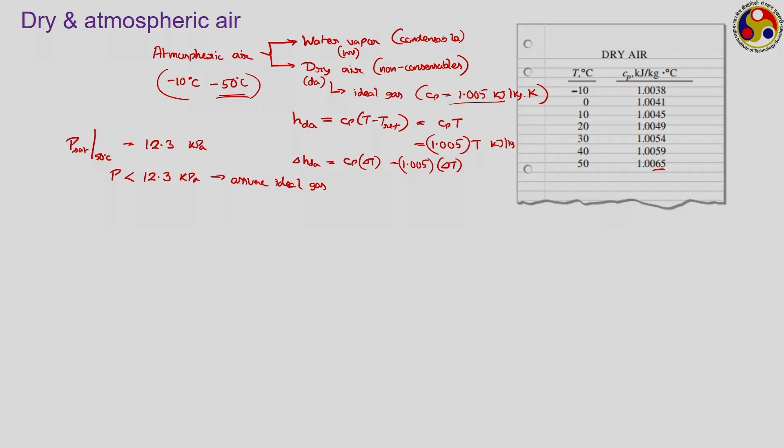Now, from the property values, it has been seen that as long as the pressure of water vapor remains below this 12.3 kilopascal, we can assume it to be an ideal gas with hardly any error, as we shall be seeing shortly, because within this zone we can safely use the relation PV equal to RT even for water vapor as well, and that simplifies our analysis quite a bit.

We are going to treat this atmospheric air as a combination of two ideal gases. One is the dry air part, the other is the water vapor part, and accordingly the total pressure can be represented as the summation of the partial pressures of the two components, the dry air part plus the water vapor part. So, the total atmospheric pressure is a summation of the partial pressures of dry air and water vapor, because we are assuming the dry air part and also the water vapor part as ideal gases.

While it is not very surprising that the dry air is behaving like an ideal gas, it may be a bit surprising with the water vapor, but that is actually a great relief to us, as we do not have to go to the tables to calculate the properties of water vapor. We can easily calculate this by assuming this to be an ideal gas. So, both the dry air part and water vapor part follow the ideal gas equation of state.

If we take a certain volume of atmospheric air, often called the moist air, the dry air is without the water vapor, and when we mix water vapor with dry air, this mixture is often called the moist air. So, if we take a particular quantity of moist air and we measure the corresponding volume and the temperature of the moist air, then we can easily apply the ideal gas equation of state over the entire mixture.

If we talk about the mixture, if P refers to the total pressure of the mixture and V is the volume, then PV should be equal to N into R bar into T, and this is for the total mixture, that is total moist air. Similarly, for the dry air part, we can write the partial pressure into the total volume equals the number of moles of dry air into R bar into T, and similarly for the water vapor part, its partial pressure into V will be equal to number of moles of water vapor into R bar into T.

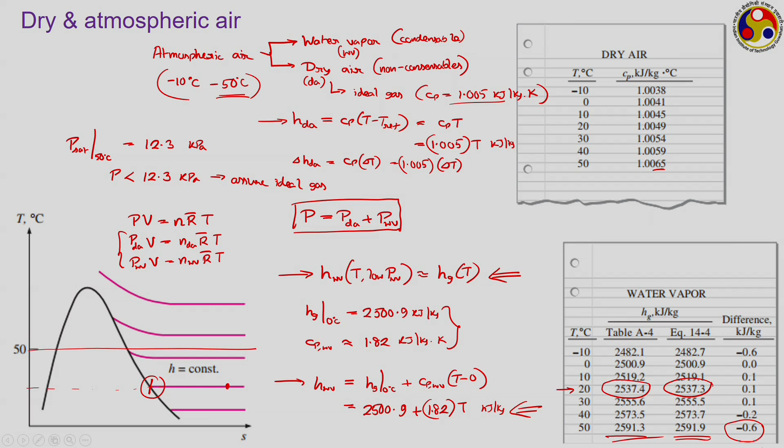Let us now move to two terms which are very common, specific and relative humidity. At least the term relative humidity must be well known to all of you, because whenever we hear a news bulletin about local temperatures, they also mention the relative humidity, and we know that high relative humidity generally means a very moist and not very comfortable situation. We shall learn the definition of relative humidity, but before that, specific humidity, often called absolute humidity or humidity ratio, needs to be defined. We generally use the symbol omega for the absolute humidity.

The definition of absolute humidity is very simple. In a sample of moist air, absolute humidity or specific humidity or humidity ratio is just the ratio of the masses, mass of water vapor by mass of dry air. As I have mentioned, the quantity of dry air generally does not change during air conditioning application. So, quite often we represent different properties in terms of per unit mass of dry air.

Like we shall shortly be seeing, the total enthalpy and a few other parameters are defined in terms of per unit mass of dry air. Very similarly, here the mass of water vapor is defined as per unit mass of dry air, and that is what we are calling the humidity ratio. Now, we know that both dry air and water vapor can be assumed to be ideal gases, and we can use the PV equal to nRT relation on this.

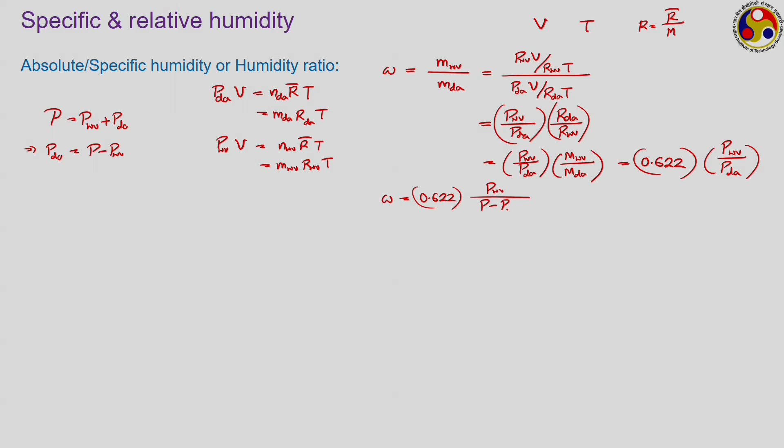So, if we have an idea about the partial pressure of the water vapor, we can calculate the humidity ratio, or vice versa, if we know the specific humidity, we can calculate the partial pressure of the water vapor from the knowledge of the total pressure, that is, atmospheric pressure. Now, we have the relative humidity. Let us say we have a certain sample of air. We know the pressure and temperature for this one.

So, we know the total pressure, we know the temperature, and at a particular instant of time its specific humidity is omega 1. Corresponding to this omega 1, it has some mass of dry air and some quantity of water vapor, let us say m water vapor 1. Now, we keep on adding more and more water vapor to this. The mass of dry air remains unchanged, but the mass of water vapor keeps on increasing, and so the specific humidity also keeps on increasing.

But as specific humidity increases, initially the total pressure and temperature of the system will remain the same. But as the mass of water vapor is increasing, whereas the mass of dry air remains the same, then while omega is increasing, the partial pressure for the water vapor is also increasing, whereas the partial pressure corresponding to dry air keeps on decreasing, because total pressure and temperature remain the same.

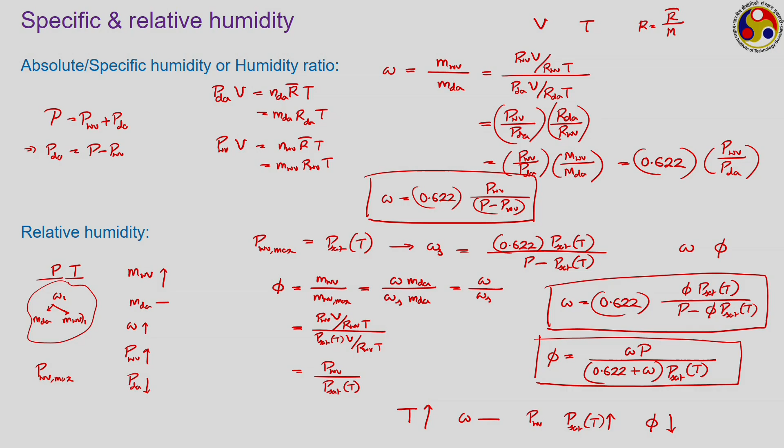What about relative humidity? Partial pressure for water vapor is the same because the masses are not changing, and total pressure is also not changing. But as the temperature increases, the saturation pressure also keeps on increasing, and therefore relative humidity keeps on decreasing. Therefore, when the temperature of a sample increases, its specific humidity remains constant, but relative humidity decreases. The reverse is true when the temperature decreases. What will be the effect of pressure? You think about that. I am leaving that to you.

Next, I move to the term called the dry bulb temperature. Dry bulb temperature is nothing but the temperature of the air. The normal temperature that we can measure with a thermometer or any temperature measuring device, we generally call it dry bulb temperature. Here the term bulb refers to the bulb of a mercury or other liquid-filled thermometer. Quite often this temperature is also written as T dB, where dB refers to dry bulb.

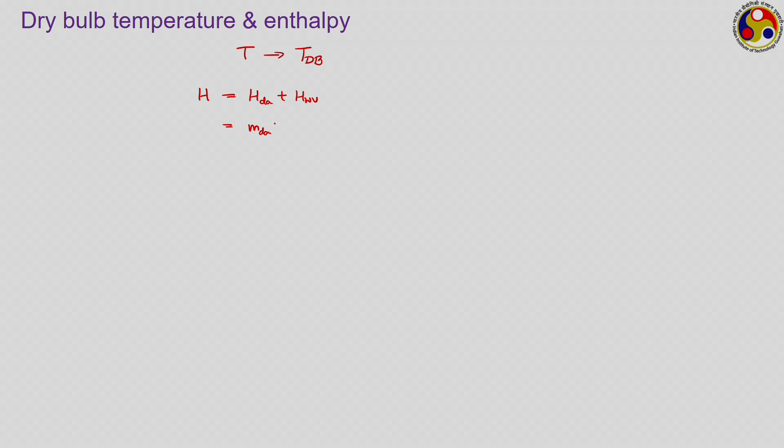And what about the enthalpy? We are talking about a mixture of ideal gases. So, enthalpy for the air will be equal to the enthalpy for the dry air part plus enthalpy for the water vapor part. Enthalpy for the dry air part will be equal to mass of dry air into its specific enthalpy, and this will be mass of water vapor into its specific enthalpy. Now, if we divide everything by the mass of dry air, we get the specific enthalpy for the moist air, represented per unit mass of dry air.

So, here for the specific enthalpy of moist air we are not dividing by the mass of the total sample, rather by the mass of the dry air only, because the water vapor part may keep on changing, but the dry air part generally remains constant. So, the right hand side will be equal to h for dry air plus mass of water vapor by mass of dry air into h for water vapor, that is h for dry air plus omega into h for water vapor, because this bracketed term is nothing but the specific humidity. And we now know how to estimate these values.

H for dry air, as you have seen, can be written as 1.005 into the dry bulb temperature. I am not putting the subscript, but you can also use the subscript dB, whereas for the water vapor part it will be omega into, for water vapor what we have written earlier, 2500.9 plus 1.82 into the dry bulb temperature. So, this way we can get the specific enthalpy of the moist air sample.

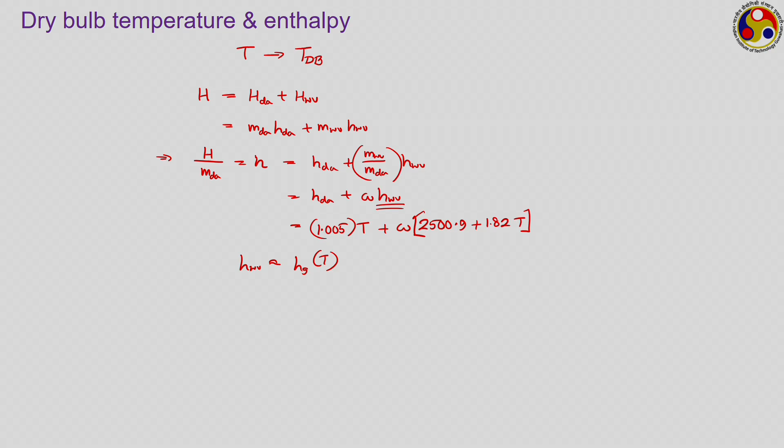Remember, this H water vapor which we are writing in this particular form, we can also write as H water vapor is equal to the Hg for that given temperature. As we have seen, both of them nearly give you the same value. So, this is the idea. Here the moist air part is omega. Suppose if we are taking 1 kg of dry air, then there will be omega kg of moisture and the total mass will be 1 plus omega kg. So, we are having this as the total enthalpy, or I should say the specific enthalpy for the mixture.

Just make a note of the unit that we are using here, kilojoule per kg of dry air. It is important to mention this dry air part in the suffix or in the denominator, because we are defining the specific enthalpy not in terms of per unit mass of the moist air, rather per unit mass of the dry air only. Let us quickly solve one problem just to see the application of this.

Here we are talking about a room. The volume of the room is given, it is maintained at a temperature of 25 degree Celsius and 100 kilopascal, and its relative humidity is 75%. So, we have phi equal to 0.75, total pressure of the sample is 100 kilopascal and its temperature is 25 degree Celsius. I repeat, generally we use a symbol capital T to denote absolute temperature, but when we are talking about air conditioning application, that is gas and water vapor mixture, we keep on using capital T, but define everything in Celsius.

Now, we have to find the partial pressure of dry air, the specific humidity, mass of dry air and the total enthalpy of dry air. So, we need to know the properties at this given temperature 25 degree Celsius. So, I have noted down the properties. Saturation pressure for this given temperature, T equal to 25 degree Celsius, from the saturation table we can get to be equal to 3.1698 kilopascal, and Hg for water at T equal to 25 degree Celsius is equal to 2546.5 kilojoule per kg. These values are taken from the table corresponding to 25 degree Celsius.

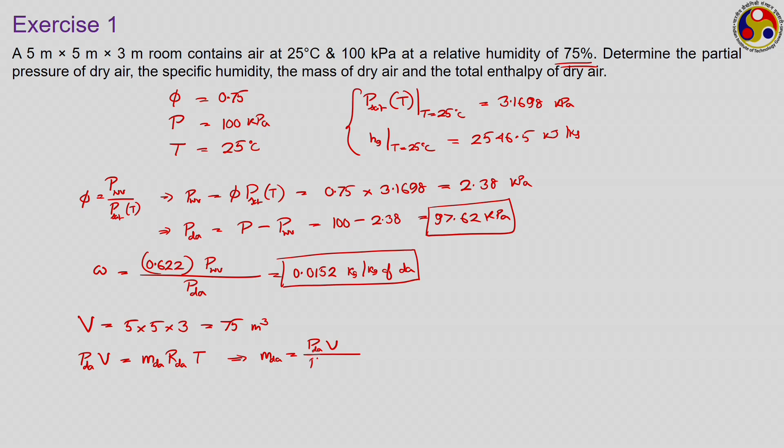So, if we apply the ideal gas equation of state on the dry air part, then we can write P dry air into volume will be equal to the mass of dry air into R for dry air into the temperature for this room. So, mass of dry air then should be equal to P dry air into V by R dry air into T.

Now, partial pressure for the dry air part we have just calculated to be equal to 97.62 into 10 to the power 3, total volume is 75. R for dry air is 287 joule per kg Kelvin, and temperature here of course we have to go for the absolute temperature because in the ideal gas equation of state we use absolute temperature. So, it is 25 plus 273, putting the numbers, the mass of dry air will be 85.61 kg.

If you want to calculate mass of water vapor, how can we calculate that? You now know omega, you know mass of dry air, so it will be nothing but omega into mass of dry air, which is just 0.0152 times 85.61, which will be coming as 1.3 kgs. So, this is the third result that we are looking for, and finally, we have to get the total enthalpy. Not of the dry air, I want to calculate the total enthalpy of the air sample.

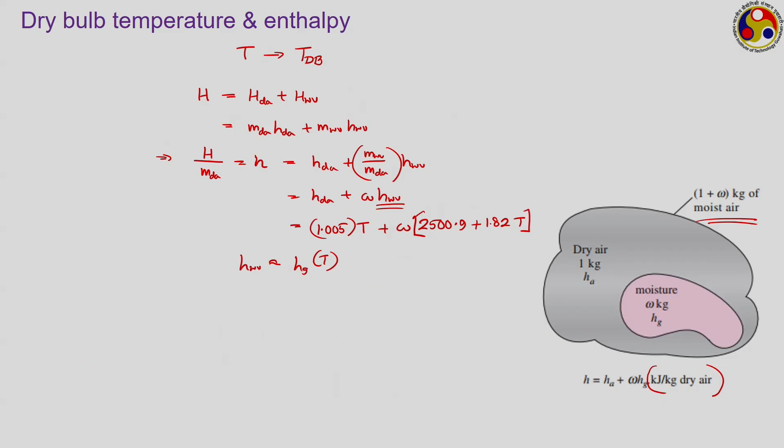Now, we know that specific enthalpy for the sample is defined as H for the dry air part plus omega into H for the water vapor part. For the dry air part, it is Cp into the dry bulb temperature, which is 25 degree Celsius in this case. Remember, here this T has to be in Celsius because we are actually writing T minus T reference, and T reference is 0 degree Celsius, plus omega into, here we can use the value of Hg for that given temperature, which we have noted down, or the other way we can also write this as Cp T plus omega into that relation that we have used earlier in the previous slide, 2500.9

plus 1.82 T. I would request you to calculate this particular number because Hg I have already given to be 2546.5. You put the value of T equal to 25 here and check what values you are getting. I think you are going to get something like 2546.4, that is almost same. So, putting the values, Cp for air is 1.005 and T is 25 degrees Celsius. So, you are going to get this to be equal to 63.8 kilojoule per kg of dry air.

So, then total enthalpy will be equal to mass of dry air into this. Mass of dry air we have calculated, and specific enthalpy for the moist air sample also we have got, it is 5461.918 kilojoule is the total enthalpy for the sample.

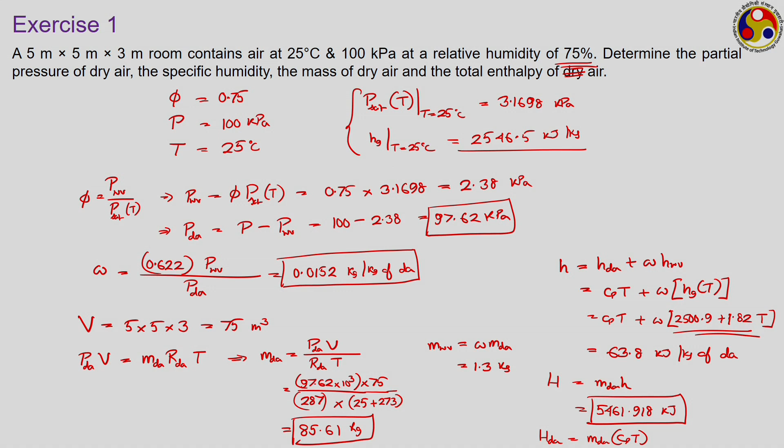And if you are interested to get the total enthalpy for the dry air part, as I mistakenly typed, then that also you can calculate. H dry air will be nothing but mass of dry air into Cp into T. Similarly, you can also calculate the enthalpy content of the water vapor part. So, we have now made use of the concept of relative and specific humidities.

Now, let us move to another concept known as the dew point temperature. Let us say we have a fixed quantity of moist air at a given pressure and temperature. Now, the total pressure of the system, let us say is P, mass of dry air and mass of water vapor, these are given. If these two are given, then from this we know the value of omega, and also if we know the omega, at least to start with, you also know the value of phi, because phi will be equal to the partial pressure for this water vapor sample divided by P sat corresponding to this temperature.

Now, as we are not going to change the mass, and also the total pressure remaining constant, therefore, the partial pressure for the dry air part and partial pressure for the water vapor part, they also remain the same. So, I repeat, we have a sample of a fixed quantity of moist air, which contains some fixed quantity of dry air and water vapor. We are maintaining the pressure and also the masses of both constituents the same, and therefore, its specific humidity and also the partial pressure for both the components remain constant.

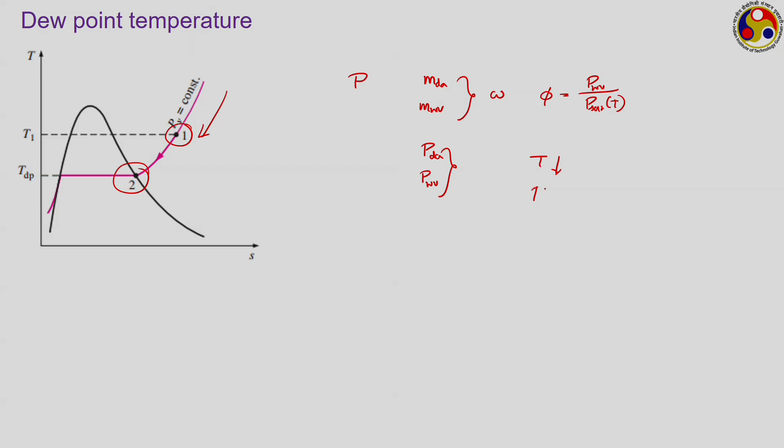Now, as you are moving from point 1 to point 2, what is happening to the specific and relative humidities? Specific humidity remains constant because the masses are not changing. So, specific humidity is a constant. What about the relative humidity? During this process, as we are moving from 1 to 2, the temperature is decreasing. Therefore, the saturation pressure corresponding to the temperature is also decreasing,

but the partial pressure for water vapor remains constant, and therefore, your relative humidity, just look at the expression here, the numerator is constant, but the denominator is decreasing. So, the relative humidity keeps on increasing, and when we reach this point number 2, the relative humidity becomes 100%. That is, the mixture becomes saturated by whatever moisture it originally had. We have just lowered the temperature, and by continuously lowering the temperature we have reached a point where the mixture is getting saturated only by the water vapor content that it originally had.

This particular temperature point T2 is known as the dew point temperature. I repeat, this temperature is known as the dew point temperature, TDP. We can write TDP, or we can also write TDPT, whatever we would like to represent this dew point temperature. Therefore, how can we calculate this if we know the partial pressure for water vapor? This has to be the saturation temperature corresponding to the partial pressure for water vapor, and the partial pressure for water vapor we can calculate from the expression for relative humidity that we originally know. So, for a given relative humidity we can easily calculate the value of the dew point temperature.

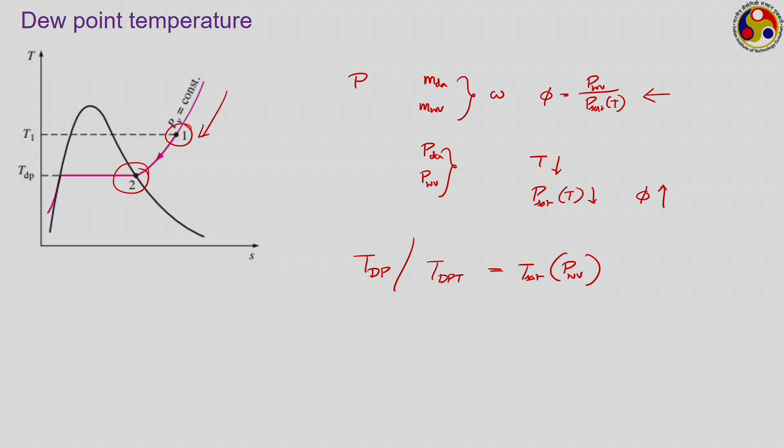Now, what is the physical significance of this? Just think, if we lower the temperature any further, then what will happen? If we lower the temperature any further, then at even lower temperature it will not be able to hold that much moisture. So, some moisture will get separated from the moist sample, and it will condense, it will get converted to liquid water, and it will get deposited. And you definitely have seen the formation of dew, the formation of mist, and that is just relevant to this.

Just take, say, a cold can of some soft drink from the refrigerator, take it outside, and immediately you will find that lots of moisture has got deposited on the outer wall of that can. That is happening because the temperature of the can surface is lower than the dew point temperature of the surrounding air, because it was inside the refrigerator. So, it is at a very low temperature, and therefore, the moisture which was present in the surrounding air gets condensed and deposited on the surface of that can. So, the concept of dew point temperature is very important for air conditioning applications, as we shall be seeing in the next lecture. Next, we move to something known as adiabatic saturation.

Now, the idea of dew point temperature is very important, as I have mentioned, but the next question is, how can we calculate the value of the dew point temperature? One option is to measure the partial pressure for water vapor, because if we know the partial pressure for water vapor, then from the temperature we can calculate the saturation pressure, and then from that ratio we can calculate the relative humidity. And also using that partial pressure of water vapor, we can calculate the dew point temperature directly, but that may not be the easiest procedure.

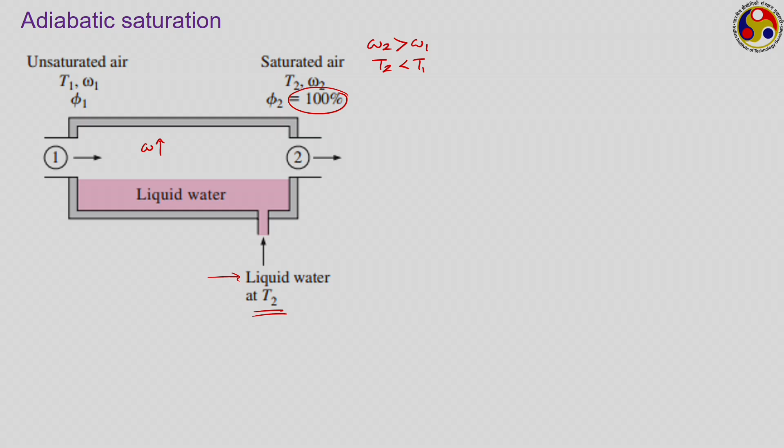Now, using this adiabatic saturation temperature T2, we can actually get a measure of the value of omega 1. With this entire apparatus, our objective is to get the value of omega 1, and that we can obtain from the measured initial temperature T1 and the finally obtained adiabatic saturation temperature T2. From the dew point temperature also we can get the value of omega 1, but that is more difficult to get, and therefore, we can go for this particular arrangement, which is called the adiabatic saturation.

Now, how can we get the value of omega 1 here? Remember, omega 2 we can also measure, but generally that is not required, because if we know T2, we know phi 2 is equal to 100%. So, omega 2 we can easily get. Now, we have to get omega 1. If we perform a mass balance for the dry air part, m dot dry air at 1 is equal to m dot dry air at 2, because there is no change in the dry air. So, let us call it m dot dry air.

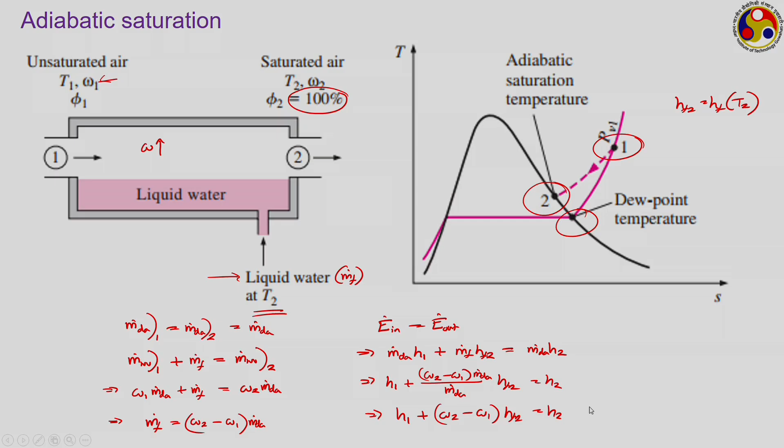Now, let us divide everything by m dot dry air. So, we have H1 plus m dot f, which is omega 2 minus omega 1 into m dot dry air, divided by m dot dry air, into HF2 is equal to H2. Removing m dot dry air, we have H1 plus omega 2 minus omega 1 into HF2 is equal to H2. Let me repeat this one here. So, we have H1 plus omega 2 minus omega 1 into HF2 to be equal to H2.

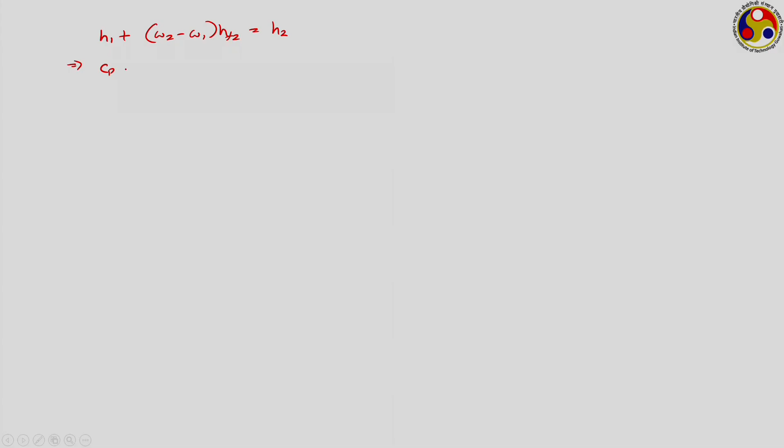Now, what is H1? For the dry air part, it is Cp for the dry air into T1, plus for the water vapor side we can write in Cp form or in Hg form. So, it is Hg1 into omega 1, that is your H1, plus omega 2 minus omega 1 into HF2, and your H2 will be equal to Cp for the dry air into T2 plus omega 2 into Hg2, where Hg2 is Hg at temperature T2.

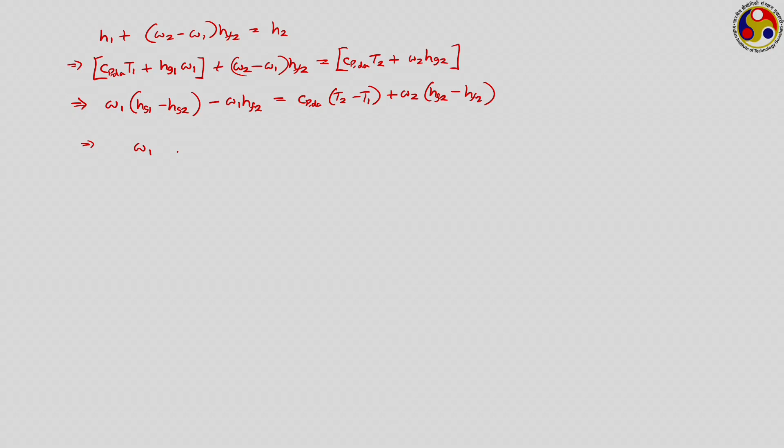So, if we separate out now the omega 1 part, we have omega 1 into Hg1 minus Hg2 minus omega 1 into HF2 is equal to Cp for the dry air into T2 minus T1 plus omega 2 into Hg2 minus HF2. So, omega 1 now becomes, if we combine inside the bracket, Hg1 minus Hg2 plus HF2, omega 2 into HFG2.

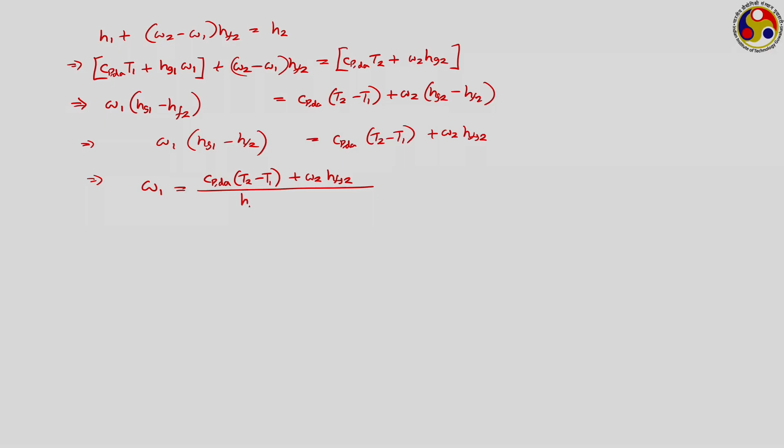Hg2 minus HF2 is what? That is nothing but HFG at 2. Here I have written one term extra: it is omega 1 Hg1 minus omega 1 HF2. So, that term I wrote wrongly, fine. Then it becomes even shorter, Hg1 minus HF2, which gives you the final value of omega 1 to be equal to Cp for dry air, which is 1.005, into the change in temperature, T1 and T2 both being known quantities, plus omega 2 into HFG2, divided by Hg1 minus HF2.

Now, what are the parameters that we have to measure? We have to measure T1, the initial temperature, and once we know T1, Hg1 is Hg corresponding to this T1. We have to measure T2, the final temperature, and then HF2 is HF corresponding to T2, and HFG2 is HFG corresponding to T2. So, we know the properties. Cp for dry air is 1.005 kilojoule per kg, but what about omega 2? How can we get omega 2? Remember, omega 2 corresponds to saturated air, the maximum specific humidity it can have at temperature T2.

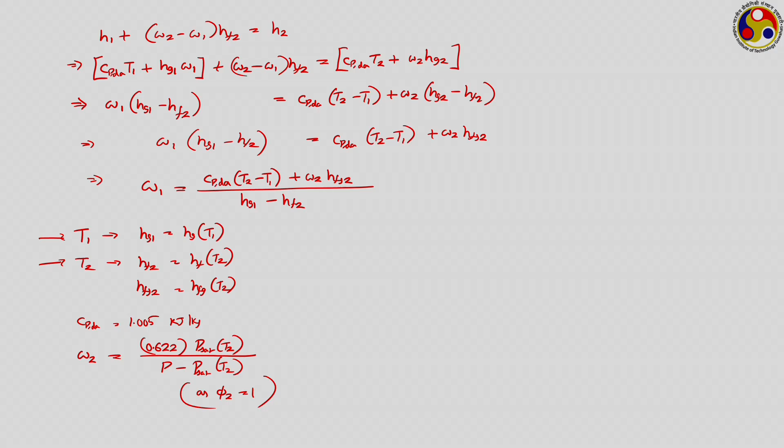So, omega 2 is nothing but 0.622 into saturation pressure corresponding to T2 divided by P minus P sat corresponding to T2, as phi 2 is equal to 1. P sat corresponding to T2 we can also get. So, we just have to measure the two temperatures T1 and T2. T1 is the initial temperature of the sample, T2 is the final temperature once it comes out after becoming saturated under this adiabatic condition, the adiabatic saturation temperature, and by getting property values corresponding to T1 and T2, we get the initial specific humidity, omega 1.

So, this is a very interesting arrangement, this adiabatic saturation condition, by which we can easily measure the specific humidity, and once we know specific humidity, we can calculate anything. We can calculate relative humidity, the partial pressure of water vapor, enthalpy, and also the dew point temperature.

But generally we need to provide a very long duct and a sufficient amount of time to get this process done. Also, getting an ideally insulated condition, a perfectly adiabatic process, may not be very practicable. So, quite often we go for a much simpler arrangement.

We take a thermometer and we cover the bulb of the thermometer by a piece of cotton or some wick, and the arrangement is such that the wick is partially immersed into a pool of liquid water, so that it always remains saturated with water. Then as air, or whatever medium for which you want to measure the temperature, is allowed to flow through, it will pick up a certain amount of moisture, and as it passes over the wick we can expect it to be saturated, and once it picks up the water vapor from the wick, the corresponding latent heat

has to be provided from the bulb of the thermometer, and hence whatever temperature we get, we call the wet bulb temperature. This wet bulb temperature in practice may not be exactly equal to the adiabatic saturation temperature, but for most practical purposes we take this wet bulb temperature to be equal to the temperature for adiabatic saturation. So, we now know that there are three temperatures that we talk about.

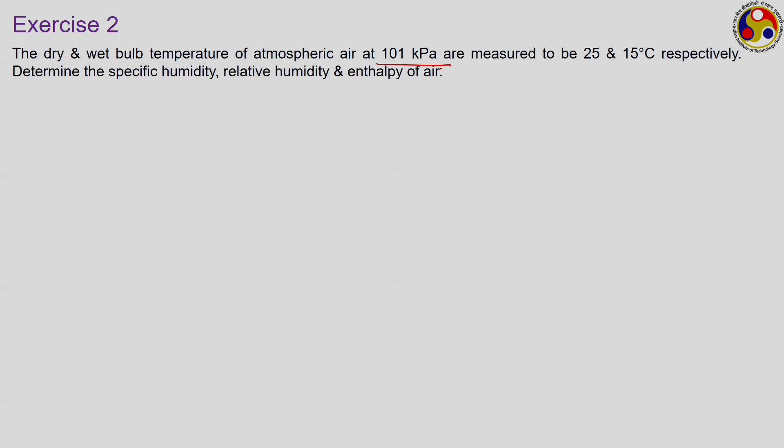content. So, to finish with, I have a very small numerical example where I shall be using the concept of both dry and wet bulb temperature. We have atmospheric air at a pressure of 101 kilopascal, the dry bulb temperature is 25 degrees Celsius and the wet bulb temperature is 15 degrees Celsius. You have to find the specific and relative humidities and the enthalpy of air.

As we know the two temperatures, the saturation pressure corresponding to 15 degrees Celsius is 1.7057 kilopascal, and corresponding to 25 degrees Celsius it is 3.1698 kilopascal. These two properties we have taken from the table, and once we have this, we can get everything, because we know that omega 2 will be equal to 0.622 into P sat corresponding to T2. T2 means which one? T2 is the wet bulb temperature.

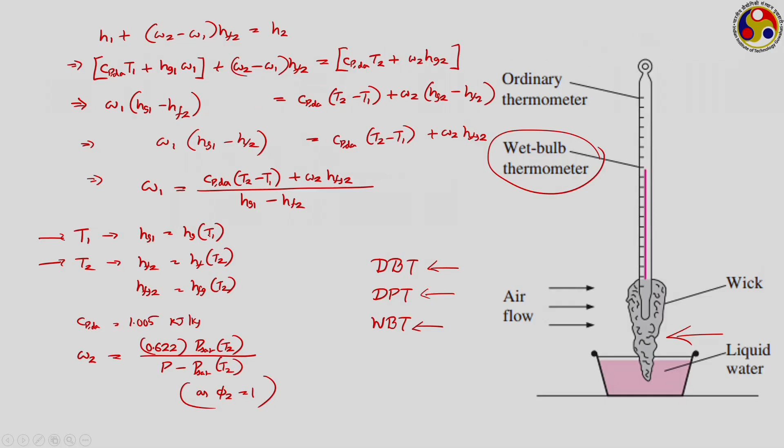So, it is 0.622 into 1.7057 divided by total pressure 101 minus 1.7057, and it is coming to be 0.01065. So, you know omega 2. Omega 1 we can calculate from the formula we derived earlier. We have Cp for air equal to 1.005 into the change in temperature, T1 is 25, T2 is 15,

and if we go back, we have plus omega 2 into hfg2, omega 2 is 0.01065, into hfg corresponding to 15 degrees Celsius, which I have not noted, you can take the value, and then divided by hg1 minus hf2, that is hg corresponding to 25 degrees Celsius minus hf corresponding to 15 degrees Celsius. Take these enthalpy values from the table and do the calculation; your omega 1 should be something like 0.00653.

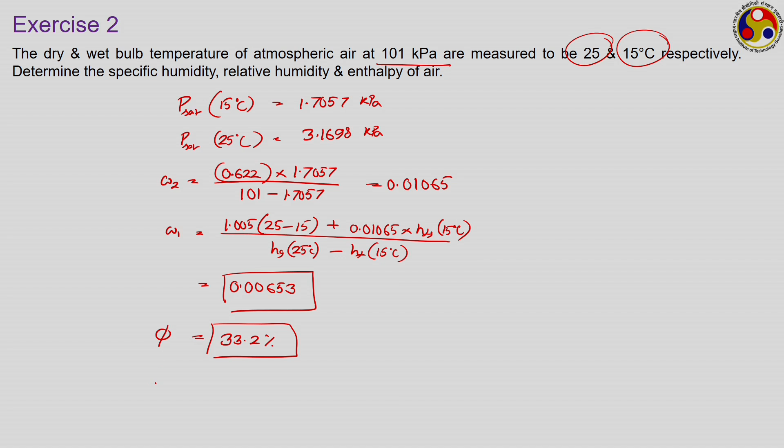Then how to calculate phi from there? We know the relation between phi and omega; there are several ways you can calculate phi from this. Just check it out, your phi will be something like 33.2%. And once you know this, you also know how to calculate the total enthalpy, or at least the specific enthalpy, for this mixture. Try to calculate this on your own.

So, that takes us to the end of our discussion for the day, where we have talked about atmospheric and dry air, the concept of dry air and moist air, the concept of specific and relative humidities, dry bulb and wet bulb temperatures, dew point temperatures, and finally the adiabatic saturation, which is also associated with the concept of wet bulb temperature.

Please rehearse these concepts carefully, because in the next lecture I am going to talk about the psychrometric chart, which allows us to get the values of the different parameters defined here directly without any calculation. Of course, we can get all these parameters by calculation, but we can also get them directly from the psychrometric chart, and then we shall plot a few air conditioning processes on the psychrometric chart to get into more detail about air conditioning calculations.